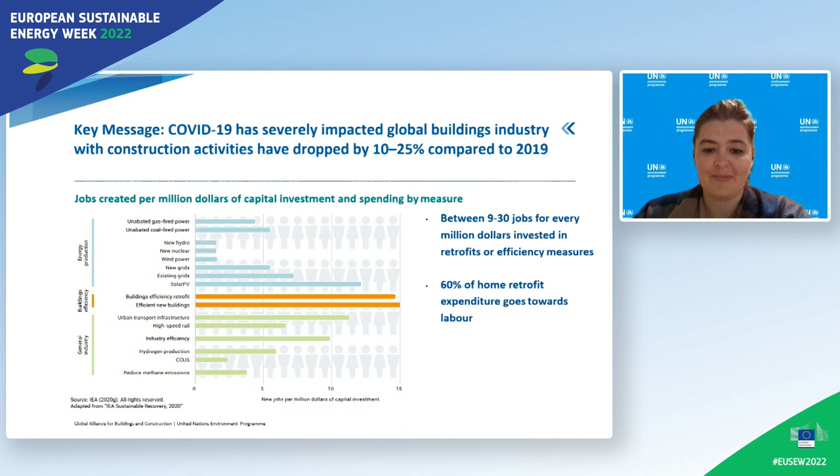I'll go through this quickly because Alejandro said it so well already. This is just to give you context of the Global ABC. We are hosted by UNEP, you can see it from our background, and we really have this aim of bringing the buildings sector to the forefront and putting it on the spot when it comes to climate action, for which obviously energy is paramount. So if you're keen to join, do contact us.

If we just go a little bit, we heard about the massive impact in terms of floor area growth, in terms of economic potential. So what do we want in terms of emission reduction? For the Global ABC, we form part of this Marrakesh Partnership for Global Climate Action. I know it's a mouthful, but basically it's a forum that assembles all the ones that are not countries, and together we formed a pathway much more comprehensive than what you see here.

But the emissions reduction goal globally for buildings is that by 2030, we need 100% of zero carbon in operation. So this is obviously energy. And by 2050, we must decarbonize along the life cycle. So energy is paramount, but let's not forget that for full decarbonization, we need that life cycle perspective, and we need those goals to be Paris aligned.

So now I would like to just talk to you about our activities. I won't say much more besides that we do track progress through our global status report for buildings and construction, and we support countries through building decarbonization roadmaps. I want to give you a snapshot of the global status report for buildings and construction, some more facts and figures.

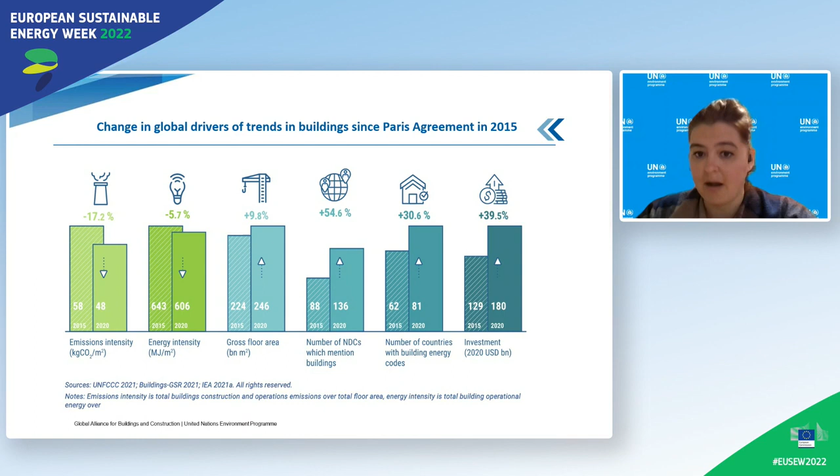That is now behind us, although maybe COVID is not yet. If we calculate out the COVID effects, the fact that a lot of construction projects were on hold, we are actually not on track. We're really not seeing the speed that we need. The gap between the zero pathway by 2050 and where we would need to be, this gap is widening, so we need to be a lot faster. We need to see a lot more of that progress I just mentioned. Next slide, please.

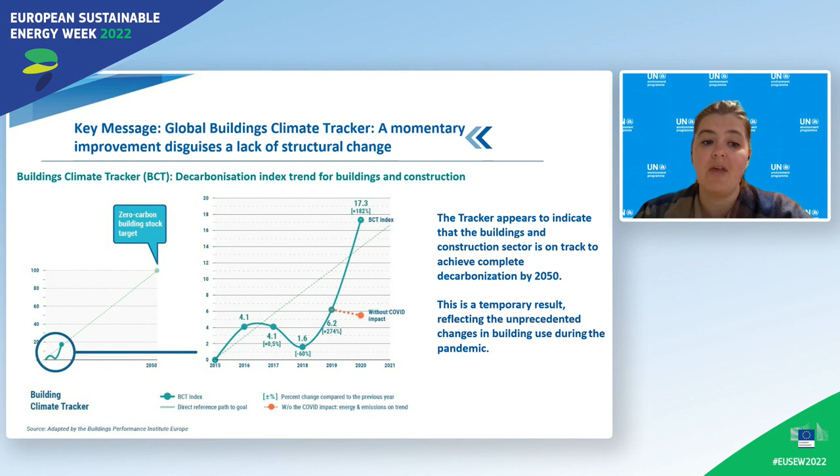Next slide. So after this gloomy message, a message of hope: again, looking at nationally determined contributions, we see that energy efficiency improvement in buildings is the most popular measure in NDCs after renewable energy. Alluding to Andrea's point, they need to be complementary, not in competition, but it's a hopeful message that this issue is really getting more and more to the forefront.

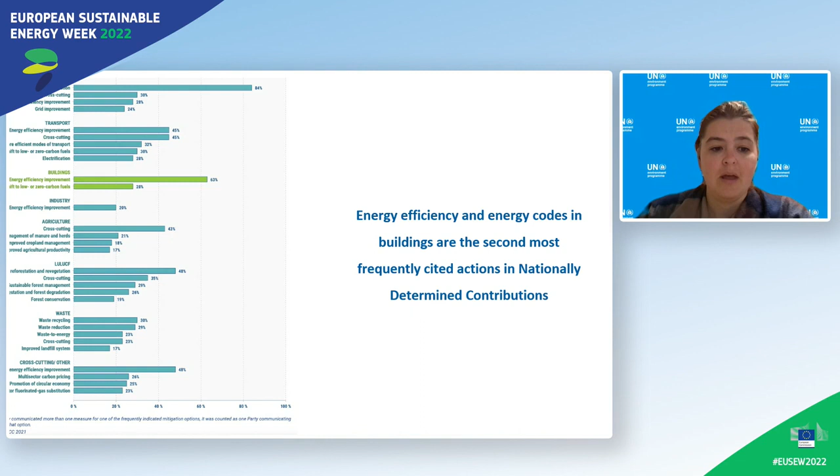Next slide. Now I will talk to you just a tiny bit about the roadmaps that we're doing with countries. So you can go straight to the next slide, please.

Thank you. So at the Global ABC, we're also working directly with countries and really with the ministries. We do not just want to do something that then sits in the drawer and is not being used. These are all really happening with and through relevant ministries on roadmaps. We have developed these with input from over 700 stakeholders globally, with 8 categories to really say it's not just about the building, it's about the building in its context. We need to have goals and priority policy and technology measures met in all of these 8 categories: urban planning, new buildings, existing buildings, operations, appliances, materials, resilience, and clean energy, to have a truly sustainable buildings and construction sector. And as I said, we have priority measures for 2030 and 2050 and all of those.

If you go to the next slide, please. After having done regional roadmaps for Asia, Africa, and Latin America, completely recognizing the diversity of these vast regions, we're now breaking these down to the national and sub-national level.

We are very pleased that a lot of our members are taking these and starting to run with it, a little bit like a franchise, if you will. These are in the public domain. Anyone can use this model.

For example, the United Arab Emirates are now using our model to develop building decarbonization roadmaps for 22 jurisdictions in the Arab League. We're seeing this take up more and more. You can see here the little pillars in regions where these roadmaps are happening.

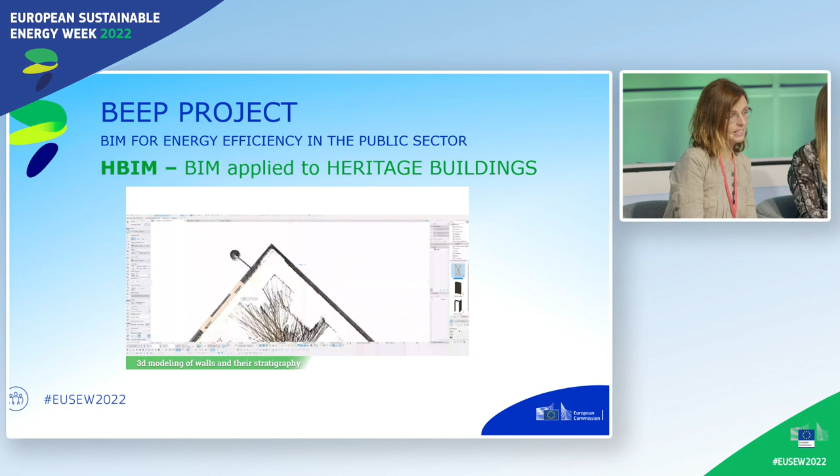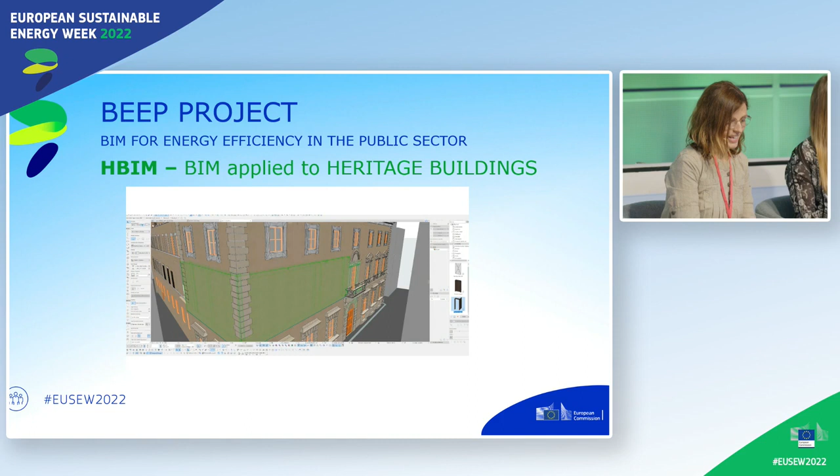Right now, what you're looking at in the background is a public heritage building, with its building information modeling. This methodology allows centralizing in a single digital model all the information of a building. It's interesting because until recently this methodology was only used for new buildings. However, heritage buildings are far more complex and include much more extensive and comprehensive data. This is why the application of BIM to heritage buildings, the so-called Heritage Building Information Modeling, is a breakthrough.

The traditional BIM model has been the 3-dimensional geometric model of a building, but the evolution of the BIM methodology has made it possible to include new dimensions. A BIM model can now include information on time, cost, environmental, and maintenance data. A model including all this data, in the case of a heritage model, is called an Energy Efficiency Heritage BIM model. The purpose of this model is to act as a kind of repository, centralizing all the information of the building, becoming an upgraded model with all the energy information, with the goal of showing how energy retrofitting measures work in this building.

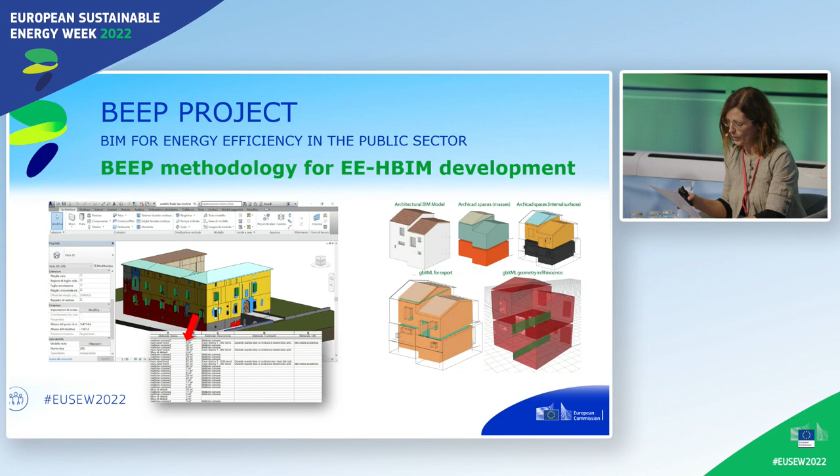Well, as you have seen before, the process of creating a BIM model, including historical information, energy analysis information, and financial data, is quite complex. And that's why the BEEP project has aimed to summarize in a synthetic and comprehensive way this process, including all the steps to be followed by the technicians in an easy and understandable way, to make the process understandable for everybody.

So the guide developed is one of the main results obtained in the BEEP project and brings together the results of 3 years of work. It presents a workflow which goes from the building analysis, the energy analysis, the design of the interventions, and the whole intervention, including the financial part.

This guide is available for free download. You will see the link in the next slide. The main goal of this project is to enhance the capacity of public administration when it comes to renovating their public heritage buildings.

Furthermore, this methodology has already been tested in 9 pilot buildings located in 7 different Mediterranean countries. It has been quite successful, and the results, also this guide, will be replicated in other Mediterranean regions through another project, also from the ENI CBC MED program, which is called the CCAP for SDG project. So this is a little bit the motivation, which Alejandro already explained.

By way of farewell, since I'm speaking about buildings, I will explain a bit about my organization, which is the Instituto Valenciano de la Edificación. We are working as the innovation agency for our regional government, and we are approaching the building sector from multiple perspectives. So in case you're interested, I invite you to visit our website.

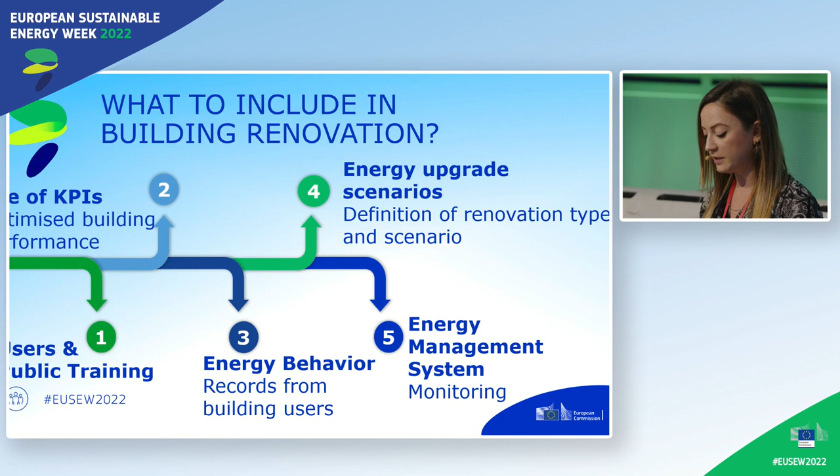Now, 2 out of the 3 pilots are in the final stage of the renovation procedure. I will not go into further details about the energy renovations, but I have collected some best practices from our experiences so far, resulting in 5 items which should not be missed when preparing a public building renovation.

The first is to build consciousness by involving users in all renovation phases - pre-renovation, the renovation stage, and post-renovation - and to train the users and the general public in energy efficiency measures.

The second is to use key performance indicators for optimizing energy performance, including not only conventional indicators, but also KPIs for renewable energy sources - for example, the green factor, which is the fraction of energy used from renewable sources divided by the total energy consumption - and other user comfort indicators.

The third is to record the energy behavior and profiles of the building users through questionnaires and interviews. This is critical since users significantly influence the final energy consumption of a public building.

A unified protocol for recording the habits of building users should be developed to estimate the type of users - high energy, medium energy, low energy consumers - and to adapt the next phase, which is the educate and train phase.

The fourth is to define the energy upgrade scenarios, which includes defining the renovation type and scenarios to be examined for public buildings.

And finally, the fifth is the development or adoption of an energy management system to monitor and control the building's energy needs.

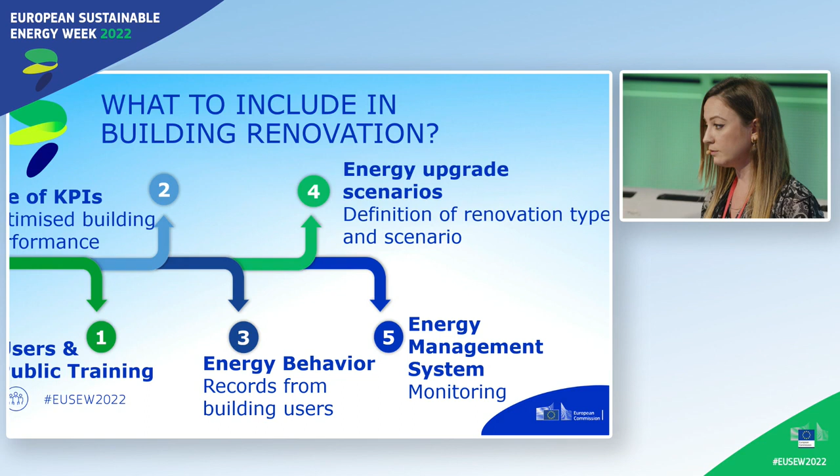So what is our plan for the engagement of building users? First of all, we involved building users from the pre-renovation stage, when we developed the energy studies.

In total, 609 respondents participated in the survey - one survey was conducted per pilot site - and the vast majority agree that sharing the amount of energy consumption with employees is important for saving energy.

During the renovation phase, we produced 2 videos on what to do to reduce energy consumption in the office building where they work, and on the role of the e-tool for energy monitoring in reducing energy consumption, and we informed users on the renovation actions.

Finally, since our goal is to enhance and promote an ecological use of public buildings, abiding by their traditional use and role in the community, 6 trainings are going to take place after the renovation actions, in the post-renovation stage.

Among others, the building users will be trained in the use of the e-tool, which will allow interconnection with the energy measuring devices of the pilot buildings, and will be used for monitoring the energy consumption of the buildings and for sharing messages for increasing energy gains.

The e-tool will allow building users to monitor energy flows, energy consumption, and demand and supply of energy, because all pilots are using photovoltaics as a renewable energy source. It will also facilitate building users' acceptance and commitment.

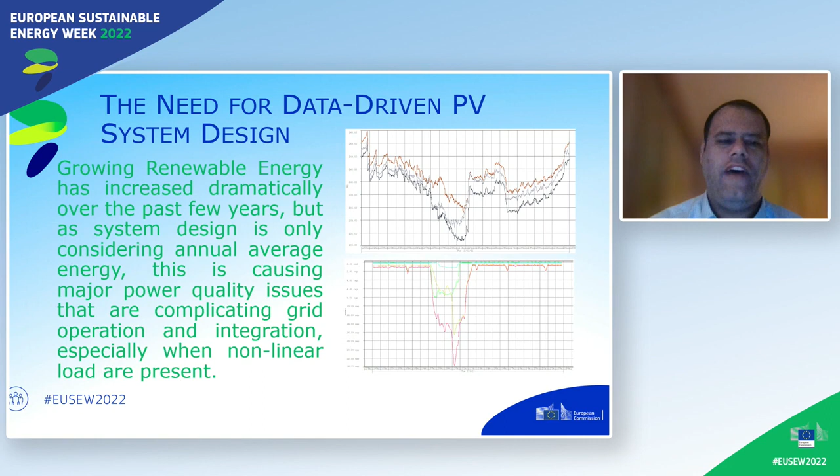Next slide please. So one of the solutions for this is, when designing a PV system, not designing it as its own entity, but designing it with the power grid in mind. And when we're doing that, what we're doing is designing the PV system with what we call power quality equipment at the same time, keeping in mind how the load is dynamically changing. This requires that we understand the connected load we have, which requires detailed load characterization.

With the ESMES project in 5 countries, we're working with 34 different schools. And what we want to do is measure the different characteristics of these different schools, and then choose a subset of those schools where we actually do our pilot programs. Next slide please.

So what we did is we installed what we're calling an online platform. This is a server that has the appropriate software to gather information from those 34 different schools in the 5 different countries. We're gathering information about energy consumption, about power quality, about current, voltage, all these different characteristics that tell us how the energy is being used at those schools. And the system generates reports that show us how this consumption is changing.

And we're using those results down the road. We'll talk about it in a second. So can you go to the next slide please?

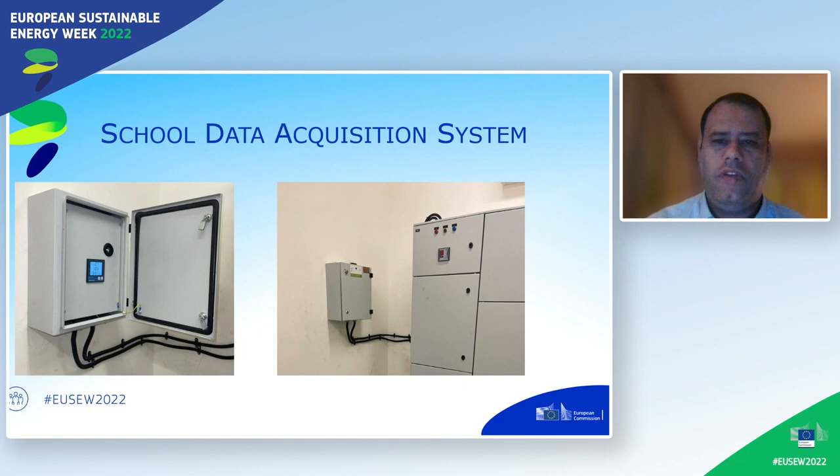So we are getting all this detailed data, and we've actually been able to share this data with some of the stakeholders in the different countries through what we're calling our national energy hubs. And even the electric companies are surprised at how much detail we have, which is typically not available even to the electric companies. Next slide, please.

And what this optimized PV system is, we're looking at sizing the PV system to be in harmony with the other equipment we have, which are the power quality equipment, such as the voltage regulators, the storage systems, the power factor correction. And we're doing this to have a better integration of all these different equipment at these public schools.

So instead of having just a PV system that's generating during the day, but it's affecting the power quality, and that could turn off sometimes when you have these nonlinear loads. And we're talking about vocational schools where we have these nonlinear loads that act very differently than what we would typically see in a residential building.

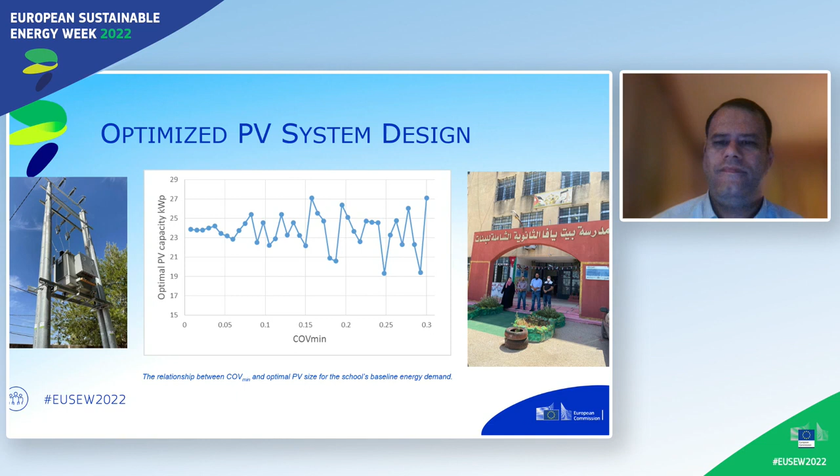I think what we all heard very loud and clear is the importance of data and also the power of digital solutions, data management systems, whether this is about monitoring, understanding what's going on in a building, influencing the behavior also of the occupants of the buildings, and also dealing with fluctuating and intermittent renewables. So I think really a very good overview of what can be done and what can be achieved. We are a tiny little bit behind schedule, but it's still manageable, I would say.

So before handing over to the next round of success stories, I would like to take the opportunity of this combined knowledge of all of you working on those projects and ask you a question: you have all worked with public authorities, different types of public authorities throughout this topic. Working with public authorities is sometimes a challenge and comes also with specific requirements and specific ways of working. So my question to you would be, how did you convince the public authorities to go ahead with the renovations, with the various renovation ideas and models that you tackled? What was it? What was the magic thing that really kicked it off and got them on board? Floor is yours, I don't know who wants to jump in first.

And maybe we have a cultural difference there as well between the different regions in the world. Maybe just a word, taking the presentation of the project of Marina: training. You have to train personnel of the public authority just so they're not worried about the news. I think certainly makes sense, it's a key step. Otherwise, it's difficult to talk.

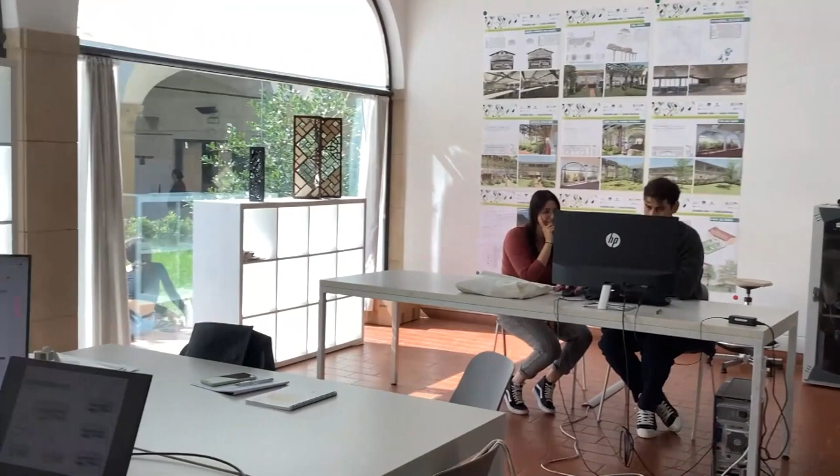The Living Lab helps to bridge the gap between stakeholder and end user, stimulating a positive dialogue to produce innovation. For this reason, we are engaging academics with experience in different fields, and above all, the students. The focus is on development of digital twins by combining building information modeling and real-time and dynamic environmental data that influences indoor comfort thanks to a continuous monitoring system.

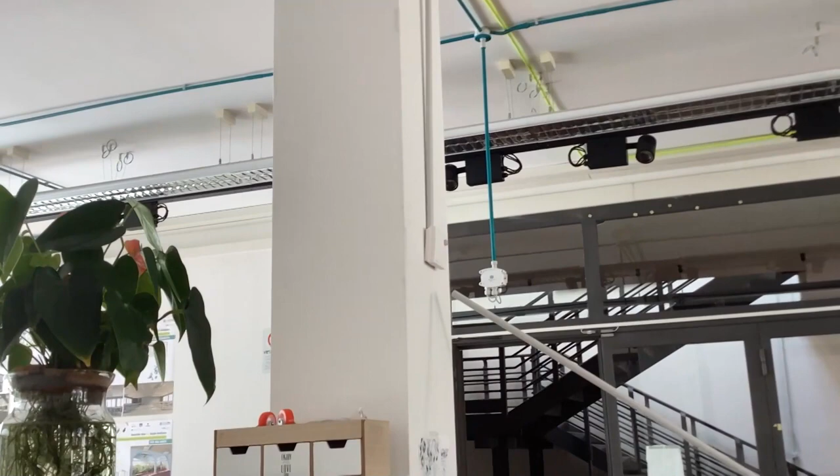Pending from the ceiling, you can see temperature and humidity sensors and globometers. On the wall, sensors of lighting level, sensors of CO2 levels, flux meters to measure the thermal flux across the envelope elements, both opaque and transparent.

We are also connecting external site-specific environmental data from a weather station. Moreover, we are also collecting qualitative data and end-user feedback with an online questionnaire on the perception of indoor comfort, to be combined with prediction of simulation and monitoring output in order to enrich the digital twin.

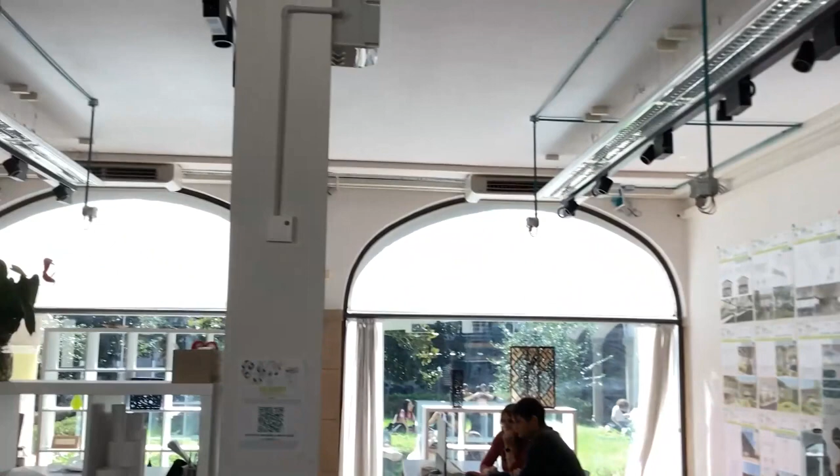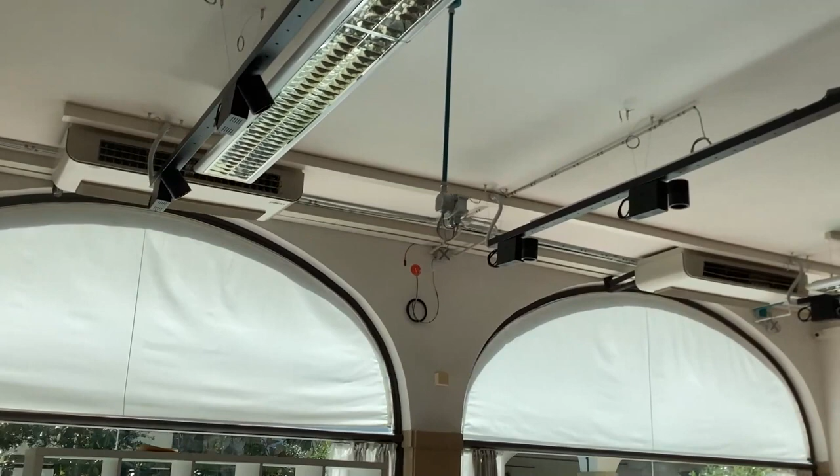You can also see the IoT LED system. It was the first installment of the energy renovation project. We decided to install a large number of lighting and monitoring devices to explore different use scenarios. Every 5 seconds, environmental data is recorded on a server.

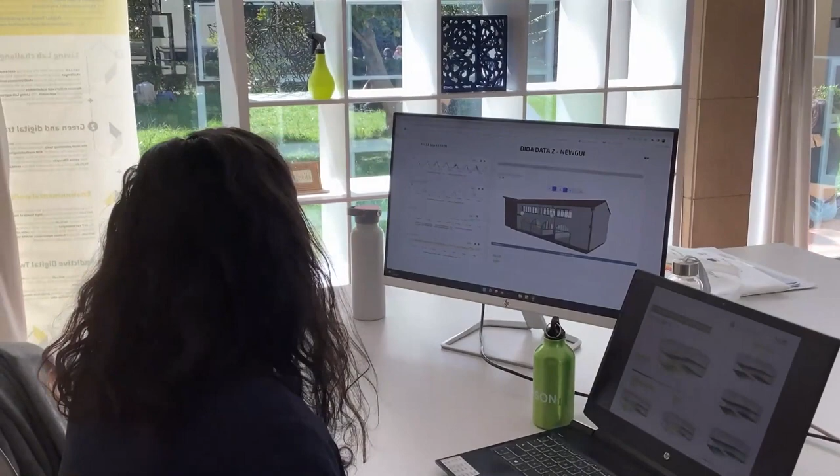It is possible to have a first visualization using an open platform. On the left, you can see the graphic representation of the daily data related to the different environmental parameters. And on the right, you can explore the BIM model.

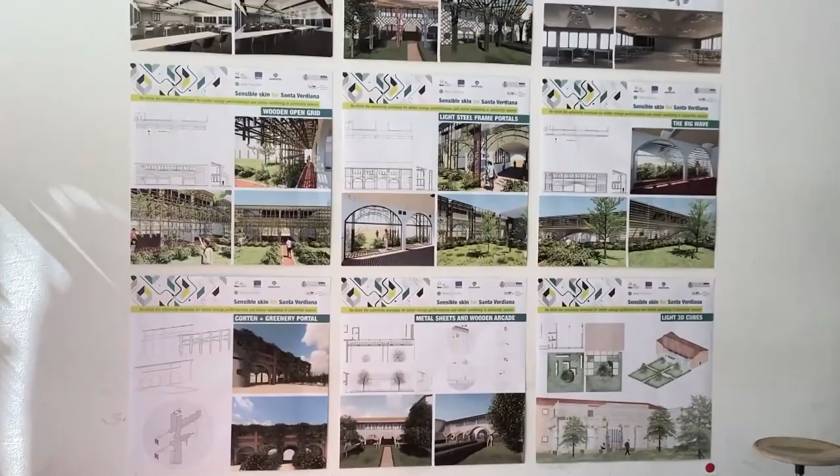In the framework of the participation of our university to the New European Bauhaus program, last year we organized an international workshop engaging architectural students in the co-design of several renovation scenarios by exploring the BIM model for the simulation of the energy performance.

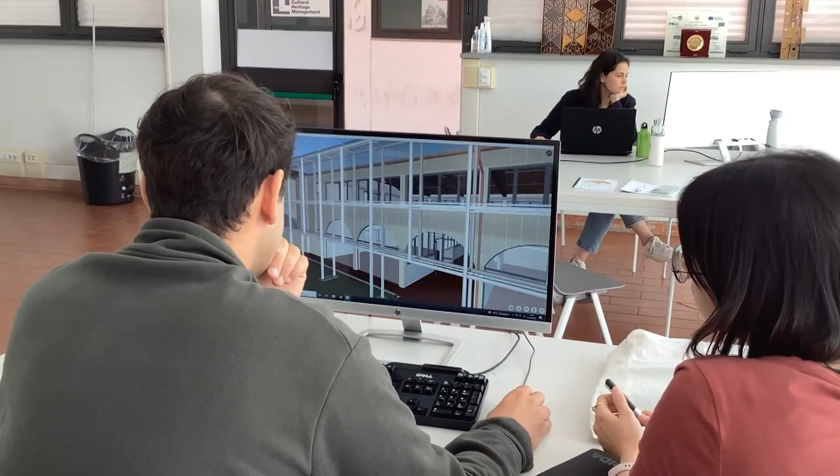Now, the final scenario is under realization. It foresees the addition of a tridimensional structure to protect the south facade, to control the solar radiation, optimizing shading and daylighting inside the room. Also producing renewable energy, integrating innovative amorphous silicon photovoltaic panels.

The future activities in the Living Lab are addressed to develop a user-friendly platform, not only for visualization, but also to stimulate the interaction for both facility manager and end user. In this way, it will be possible to augment the awareness of people on energy efficiency in buildings, stimulating more proactive behavior for well-being in the university spaces.

Thank you. I think that we can still talk with Antonella for a while. So we saw your video. Hello, Antonella. We managed to see the video, but we couldn't make the visit online.

So I wanted to ask you one question, because you talk about a digital twin, and I would like you to explain to us what a digital twin is. Thank you, Alex, for the question.

The digital twin is based on a virtual model of the building, created by BIM. So it is a methodology to create a virtual space of this. But also it's very important to implement this model with the real-time and dynamic data collected by many sensors and IoT.

In this way, it is really possible to realize a complete, very rich picture of the building, not only reproducing the energy environmental performance of the envelope and of the building, but also valorizing the role of the people, introducing many data coming from the feedback of the people inside, and data from their experience in the living space.

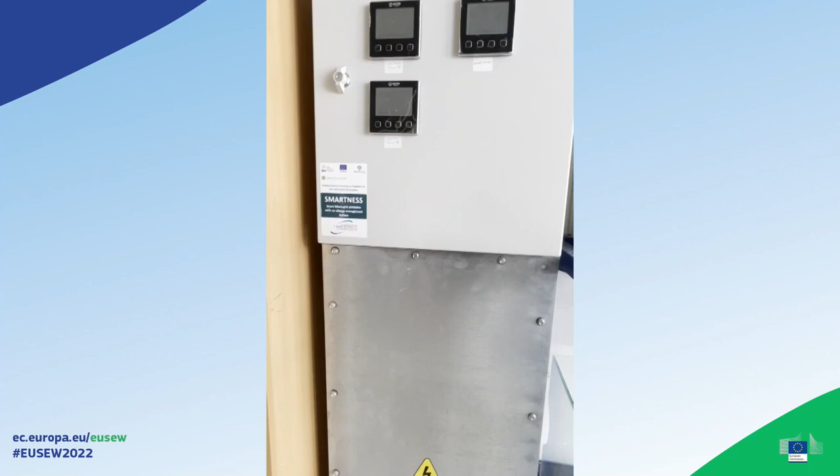Good morning, everyone. We are proud today to present the first Tunisian platform on microgrid, based on a PV generation and distributed storage system that can be used for both grid-connected system and isolated areas. This platform, named SMARTNESS, a smart microgrid platform with an energy management system, is implemented in our National Engineering School of Tunis, ENIT, in our research group lab, in the frame of the Med-EcoSuRe project.

The platform can serve for many purposes. First, as training and capacity building equipment to enhance the cooperation between our university and the socio-economic operators, mainly those working on innovative solutions with renewable energy integration. For example, STEG, our national energy provider, which is interested in such a platform to test novel power electronics and renewable-based microgrids in urban and rural areas.

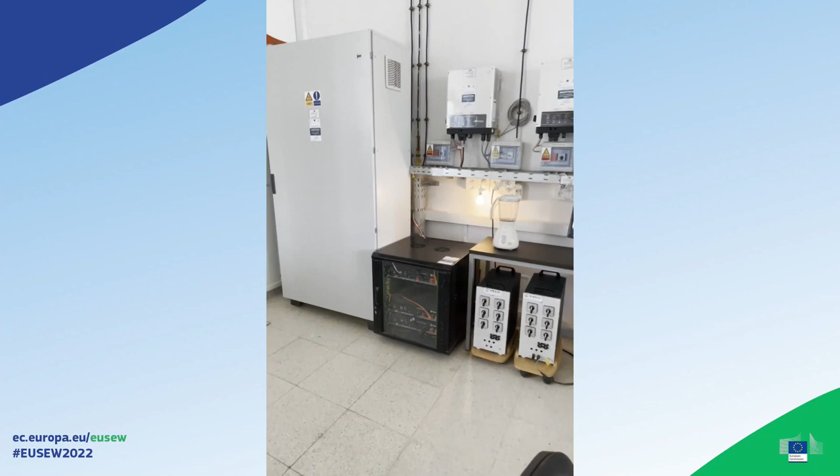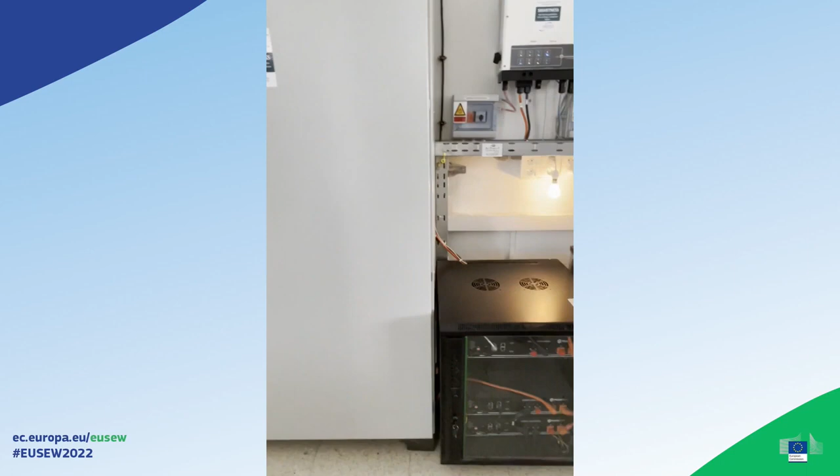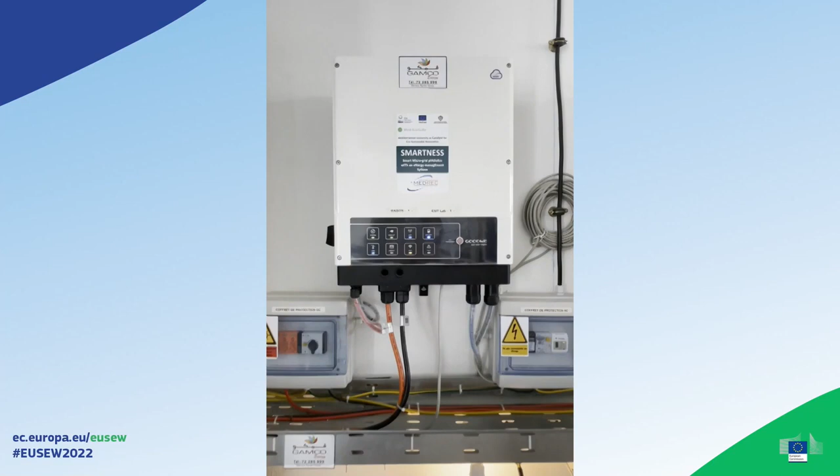Second, for academic activities, since many PhD and master students, as well as professors and researchers, are conducting their research on such topics and are interested in testing their fundamental findings on a real microgrid platform. Third, for replication and scalability, because such a microgrid can be easily replicated in other departments of our university or even in other universities, since one of the main goals of the Med-EcoSuRe project is for Mediterranean universities to stand as a catalyst for sustainable renovation.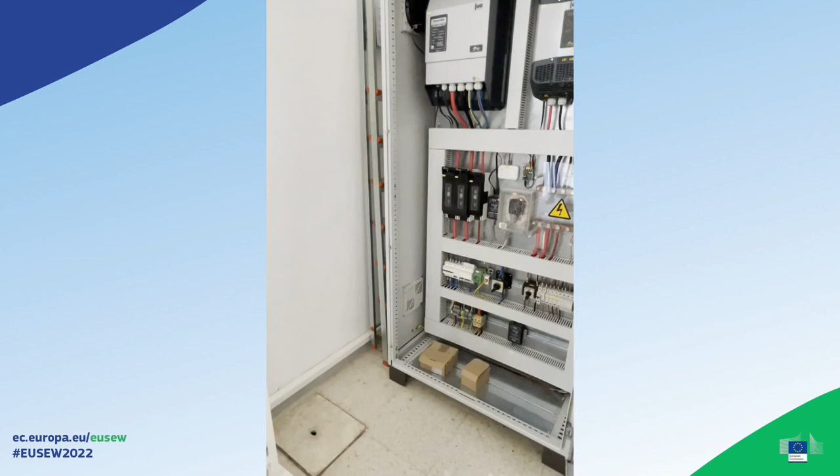From a technical point of view, SmartNest has a capacity of around 15 kilowatts, composed of a central system that you can see here, with the needed power electronics and electronic equipment that creates a local power system to feed 4 satellites. Each of these satellites is emulating a real house.

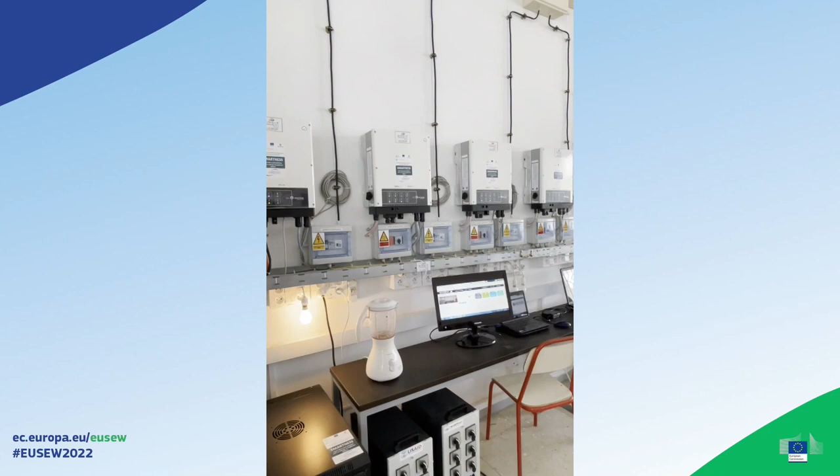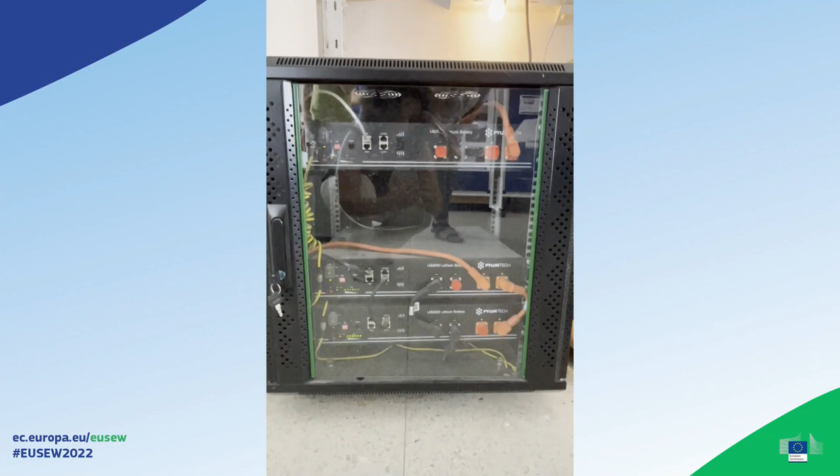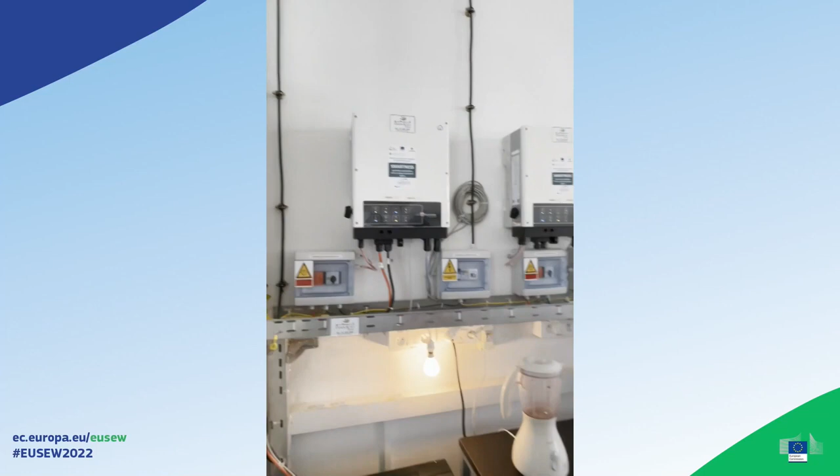The central system is connected to a PV generation system assured by 7 PV panels installed on the roof of this room, and a central storage system with these 2.4 kilowatt-hour batteries. The central system can be connected to the grid, as you see here, or operate in a standalone mode, guaranteeing energy feeding to the 4 houses since it is equipped with a smart energy management system.

So we have 4 houses, each fed by its own decentralized 6 PV panels. The first house, House 1, has in addition its local storage battery that you can see here, this is the battery of House 1. Each of these 4 houses is called a prosumer, since it can produce and consume electrical energy from its own production or from the SmartNest local grid.

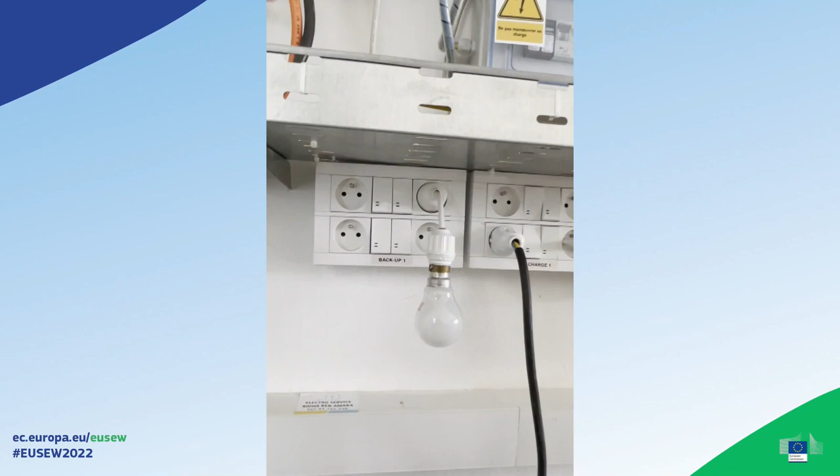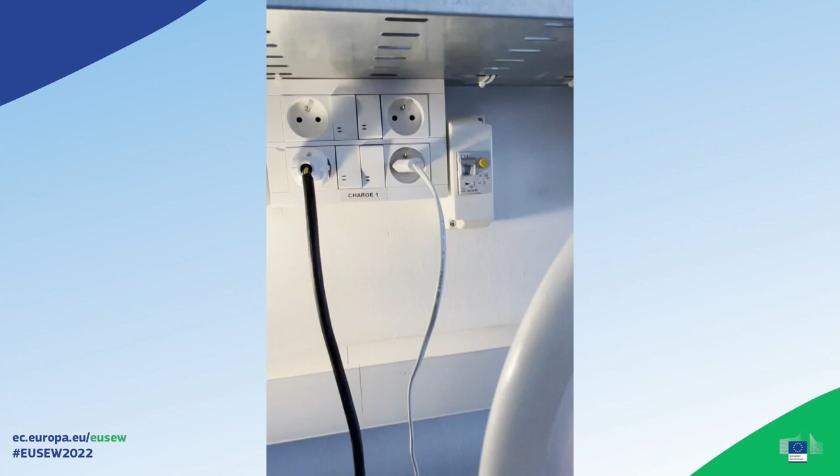Each of these houses has 2 types of loads based on the level of necessity. First, the critical loads, named here backup, that have to be always fed for security reasons, for example, such as this lighting system in our case. The second are the non-critical loads, which will not operate in case of a problem on the local grid, like the home appliance system we have here.

SmartNest is monitored thanks to 2 online platforms. First is the Julia platform, used to monitor the central system and the overall energy consumption, storage and production. The second one is the SEMS Portal platform, which monitors each of the 4 houses' system consumption, storage and production. The SEMS monitoring system is also available on smartphones connected to SmartNest.

Thank you for your attention.

Thank you, Afef. I don't know if I can, yeah, we can see you. We know that the connection didn't work very well today, but we managed to see the video. Thank you very much. I wanted to ask, because you mentioned the SEMS and Julia platforms, so if I understood well, one is for managing the microgrid connection, and the other one is to manage how the microgrid is connected to the grid, to the national grid. Is it?

Yes, in fact, Julia is the company that Gamco Energy uses for this central system. It has developed its own portal, the Julia portal, which we are using here to monitor and store data in the cloud corresponding to the energy transmitted.

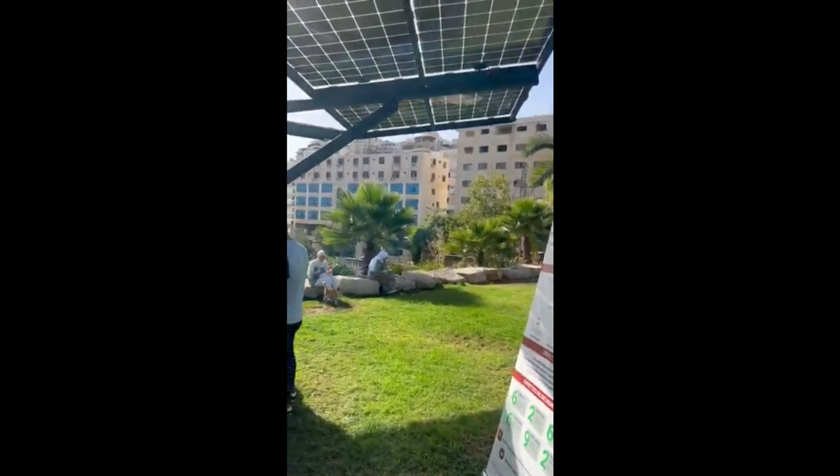The Med-EcoSuRe project has a major role in promoting the concept of renewable energy application in Palestinian universities. At An-Najah University we have installed many solar systems which contributed to reducing electricity consumption by 20% and reducing CO2 emissions by 550 tons annually, in order to increase awareness among university students.

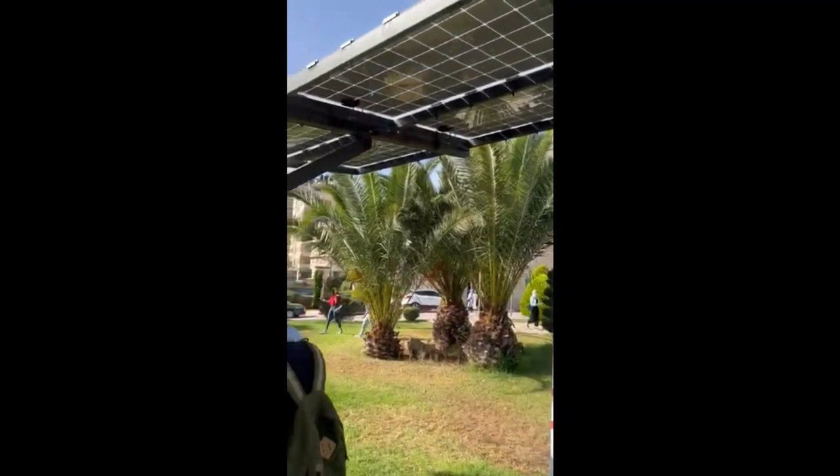Through the Med-EcoSuRe project, we have implemented a solar umbrella system so that students can easily charge their mobiles and laptops, which will increase their awareness of the importance of solar energy. The outdoor lighting of the garden has also been connected to this system in order to achieve the most benefit from the solar tree.

The solar tree has been installed with a capacity of about 3 kilowatts and produces approximately 15 kilowatt-hours per day to cover the needs of many students and ensure sufficient lighting for the outdoor garden of the university. The tree consists of 3 branches, each connected to 4 solar panels.

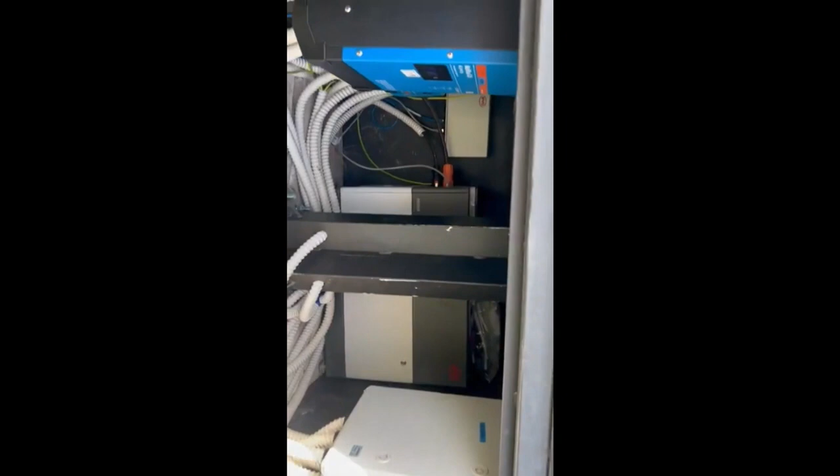During the daytime, when the sunlight is sufficient to meet the load, the generated solar energy directly feeds the load. Any excess solar energy is stored in the battery. The results and lessons learned from the implementation of the solar tree will be shared with other campuses at the university, to be able to replicate or scale up these projects.

Thank you, European Union, and those in charge of the ENI CBC MED program and MEDRIC, who is in charge of following up the implementation of the project, and for providing the opportunity to implement this project at the university, to be a model for other Palestinian universities.

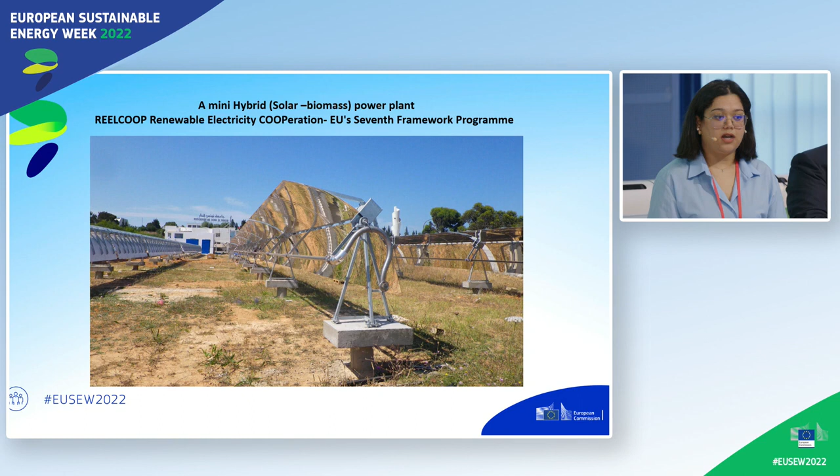These projects dealt, among other aspects, with the development of novel solutions, actions and strategies for the generation of electricity based on renewable sources, and also for the renovation of the public building stock, mainly in the Mediterranean area. I would say that the big advantage of working on this type of project and sector in particular is that you get to learn a lot of things at the same time.

This contributes enormously to building your competencies, compared to other types of jobs. I would also add that the career growth pace is quite rapid in this sector, which makes it much easier to access and fit into the global job market. I have also noticed that this sector involves a wide range of disciplines and backgrounds.

Starting from engineering to architecture, economy, physics, chemistry, etc. I have been working on these cooperation projects, including Med-EcoSuRe, CCAP, and REELCOOP, and have been involved with people who turned out to be very essential for the successful implementation of the projects in question.